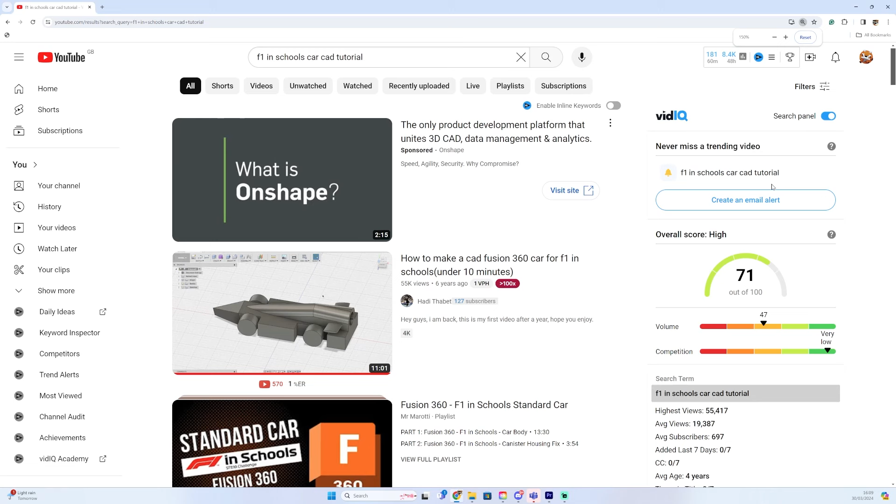So it seems to be that F1 in Schools car tutorials are now either severely out of date, or the ones that aren't out of date have questionable designs. So I'm going to be going through with you today on how to make a good F1 in Schools car.

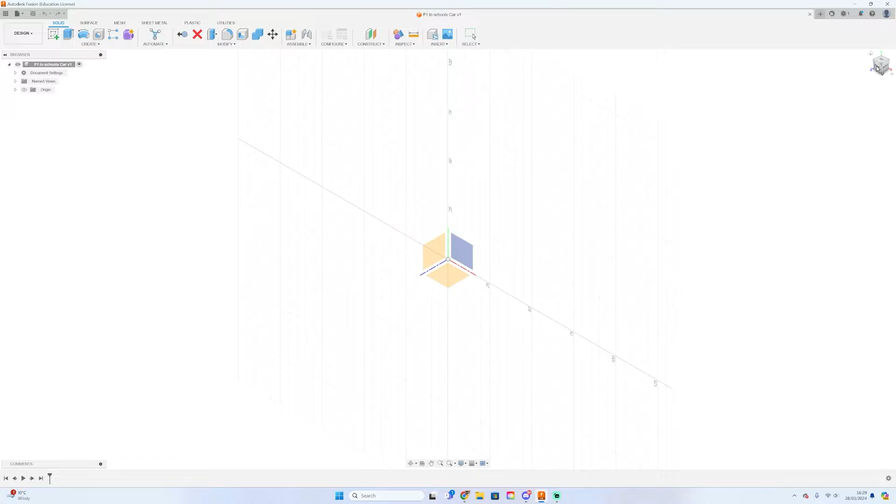So this is going to be a relatively advanced tutorial, as we are going to start looking towards what makes a good professional class F1 in Schools car. So I'm going to be expecting that you, the viewer, already know a bit about CAD and the basic Fusion tools such as Sketch, Extrude, and the Construct tool. And so I'll be skipping over the majority of that and highlighting the key areas of what makes a good F1 in Schools professional class car.

So to start off, we can get the halo. It's a downloadable component from the F1 in Schools HQ website. I'll put the link below.

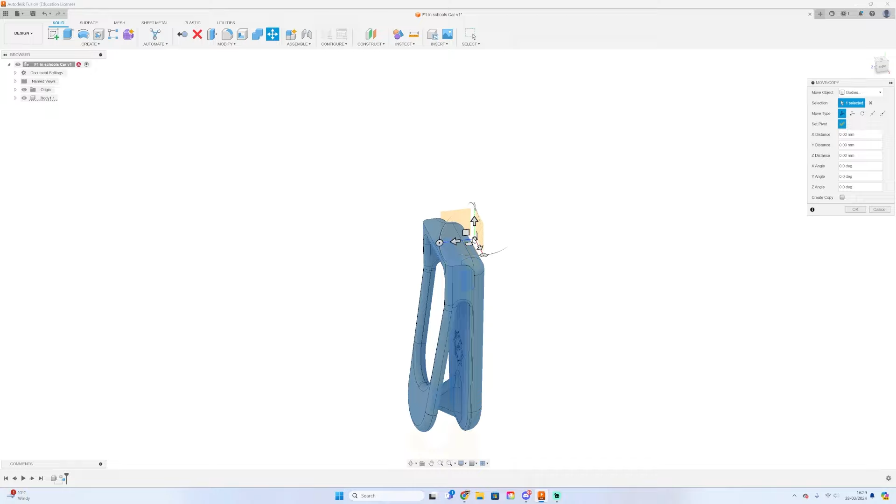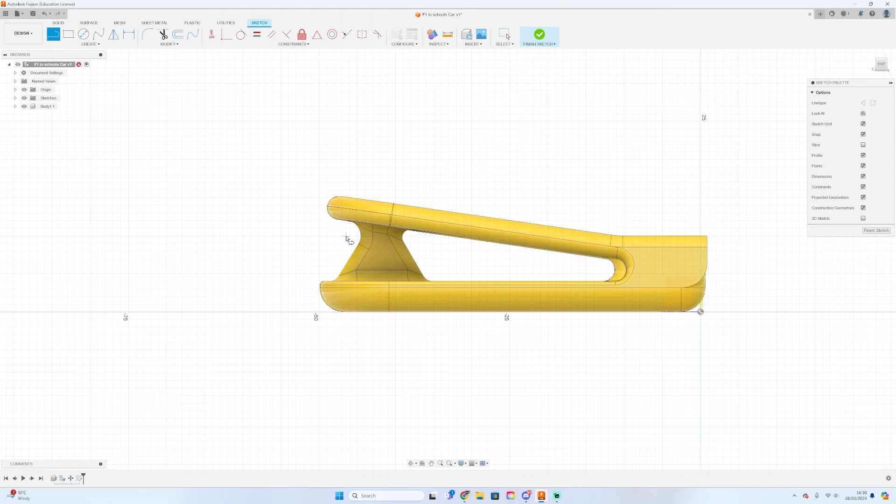And what you can do, you can move it around, and you have to make sure that the circular notch is 34 millimeters off the ground, with a plus or minus 1 millimeter for tolerance. This is just to ensure that it can be caught by the rope at the end of the track. You can move the halo around with the circular notch as the anchor point by clicking the move tool and then hovering over the face that's in the center section of the halo.

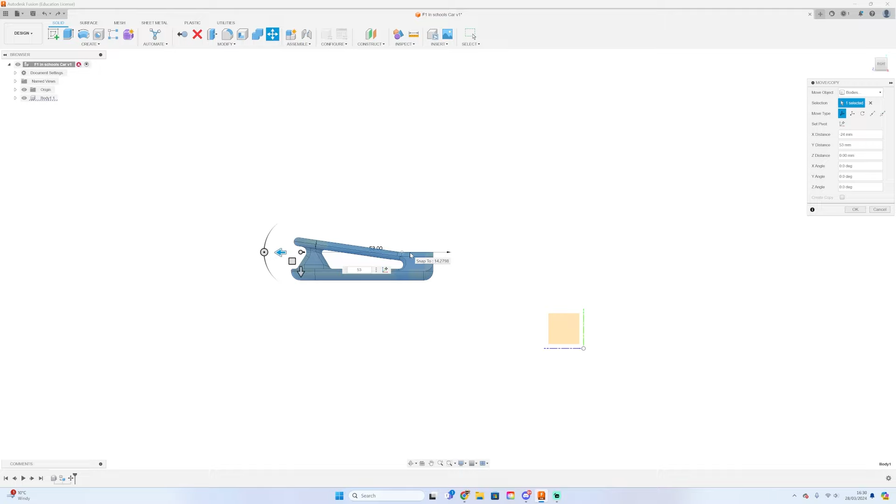Just look on the screen, and if you see the dot being roughly around the midpoint of the circle, you can just click it and start moving around. And then if you start tilting and angling the halo, that should be the anchor point at which it turns. So from there you can now see that the halo circular notch is 34 millimeters off the ground. So now that we've done that, we can start to build around the gas canister.

And so to do this, we know that the minimum height of a gas canister is going to be 24 mil. So instead, we're going to be doing 24.1 millimeters for tolerance. And that right there was my first mistake. You see, when I end up creating the CO2 chamber later on in the tutorial, I realized that the minimum thickness is actually 2.95, which is illegal. So to change this, make sure that instead of using 24 millimeters, use 25 millimeters.

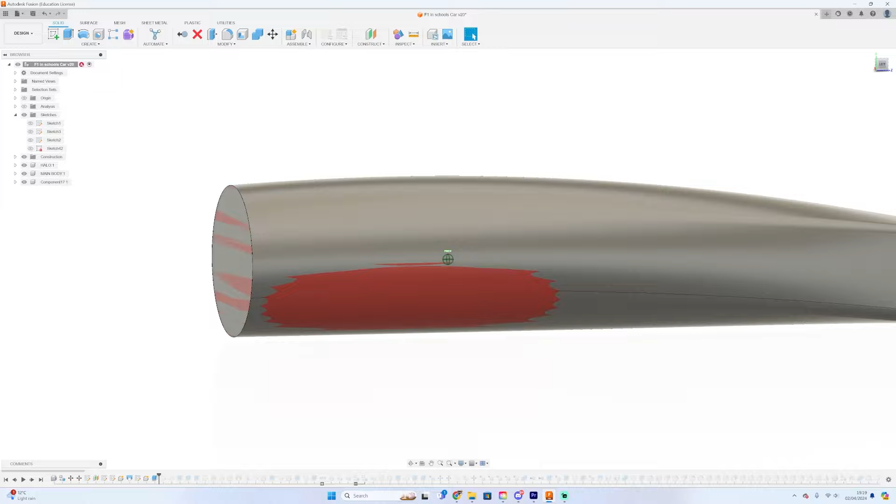And the reason why you're not going to do 24.1 is because between the first two sketches you do, the loft will actually concave inside of itself, which isn't great, and that will intersect with the CO2 chamber. After the first circle, you then sketch the second circle, that is 53 millimeters away from the first circle, your normal bread and butter stuff. But what's after this is then joining the halo.

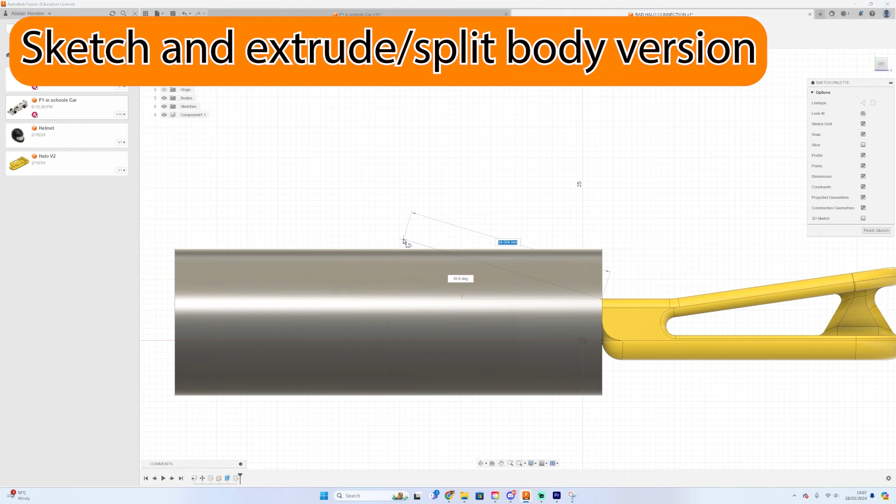So there are many ways you can blend the halo to the back of a car, and one of those is the sketch and extrude. However, it's not a great way to do it, because the sharp edges after the sketch could then disrupt the boundary layer, and it creates all sorts of aerodynamic hazards. So what we're looking for is a nice smooth connection from the back of the halo to the CO2 gas canister, and one of the tools that does this is the loft tool, which we'll look at right now.

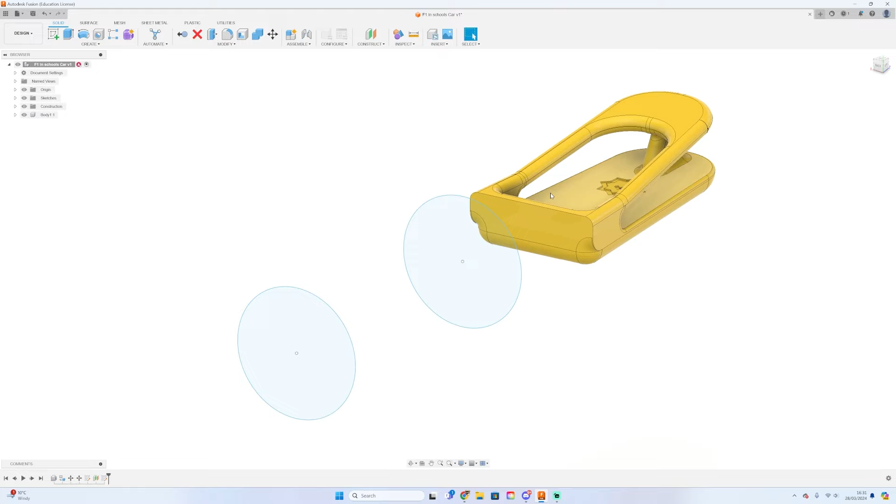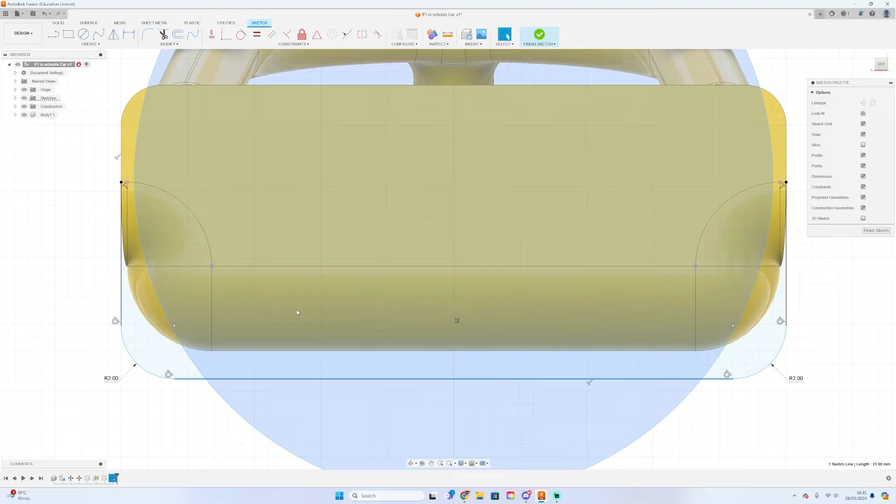But before we can actually do the loft, we need to first set up the back of the halo with a nice sketch, because at the moment the back of the halo has a flat edge that isn't very nice to loft to. So to do this, we're just going to create a nice box around the halo, then fillet off the bottom two edges. After you've filleted off the bottom two edges, you can then drag down the line to increase the area of the shape, and you want this to be roughly tangent to the bottom section of the CO2 gas canister circle, and this is going to be the very bottom of our car.

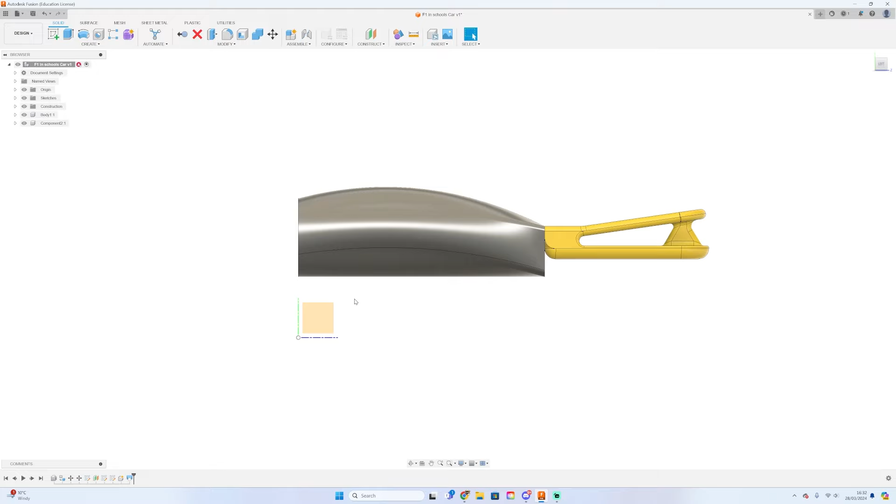So now that we've done that, we can go ahead and click loft and select those three different shapes. Now this is a successful loft, however with the halo being so far back, the loft is struggling to get to the back of the car without creating this really big curve, and this really big curve is creating a lot of frontal surface area, which we don't want.

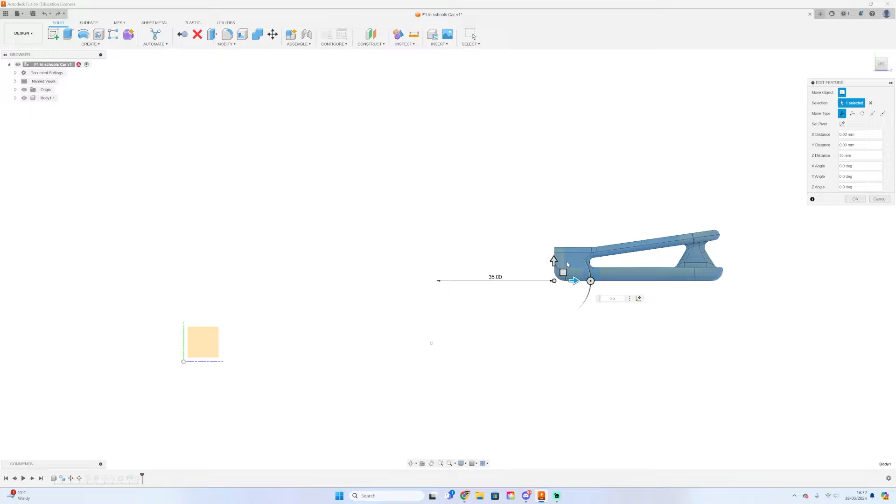So to fix this, we're going to move the halo forward a couple more millimeters, and this should decrease the frontal surface area of the car when we do the loft. And just like that, we have a much nicer connection from the back of the halo to the back of the car with a very low frontal surface area thanks to the loft.

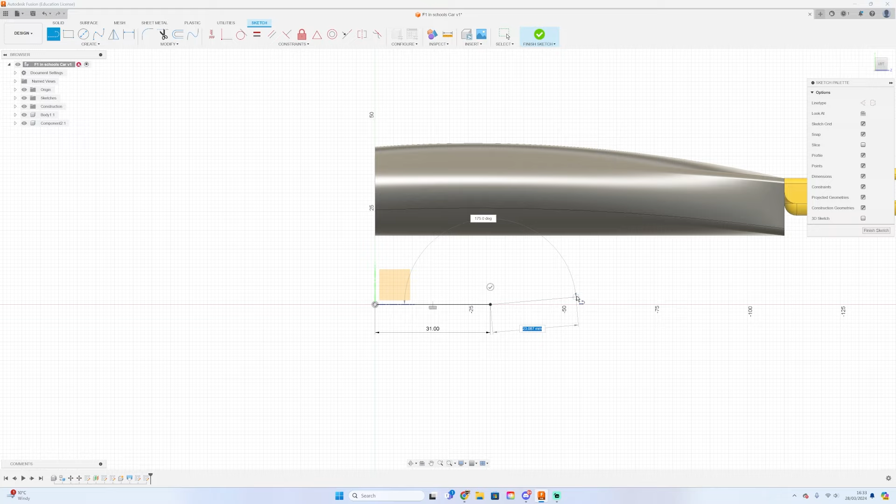So now that we've done that, we can start to look into the side profile of the car. We can start to sketch out where the wheels are going to go, reference plane B, reference plane A, and see what the wheelbase is going to be like. At the moment, I'm just going to be using 31 millimeters from the front and the back for reference plane A and reference plane B, and for the wheelbase, I'll be doing 130, as that's somewhere around the middle. Through your testing, you'll be able to work out what the best wheelbase is, but just for this car, I'll be using a wheelbase of 130.

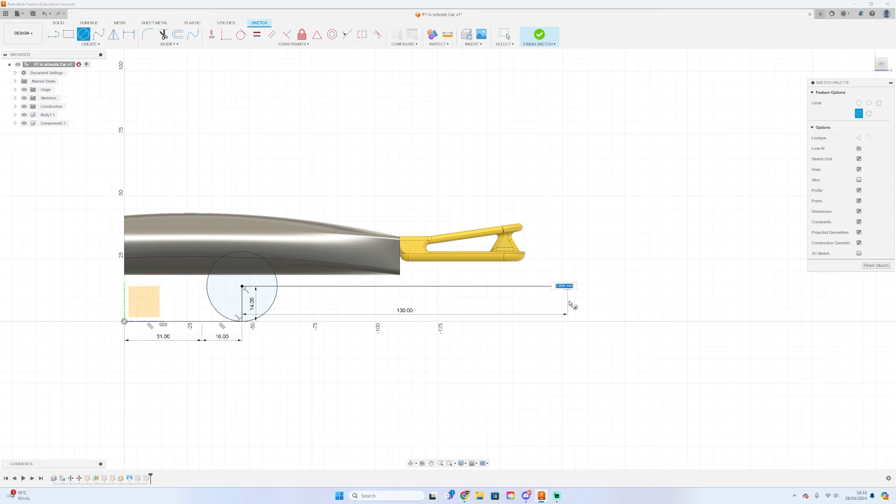Another good thing to mention is that the minimum wheel diameter is 28mm. However, for an additional tolerance, you want to put 28.1 to allow for additive inconsistencies. So that just leaves a bit of extra room to make sure that you get full marks on your scrutineering. Then after doing this, you can extrude them out from the center. You can use the extrusion tool, the normal bread and butter stuff, and you can extrude by two sides.

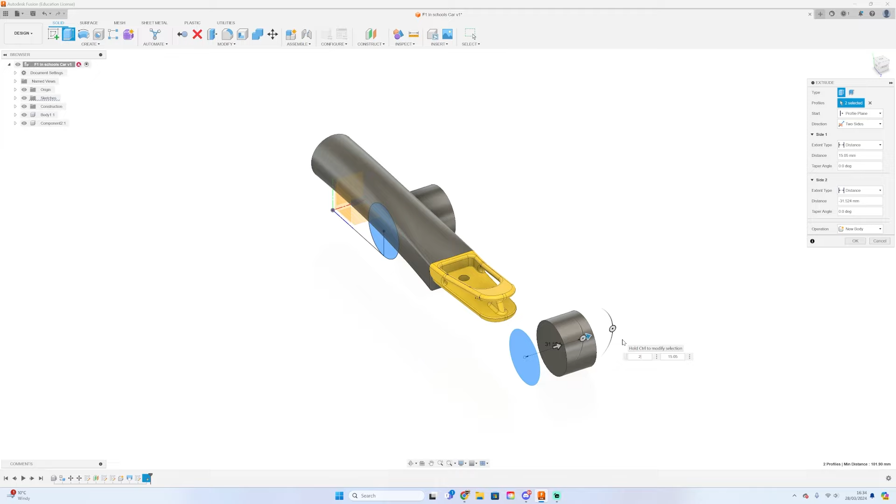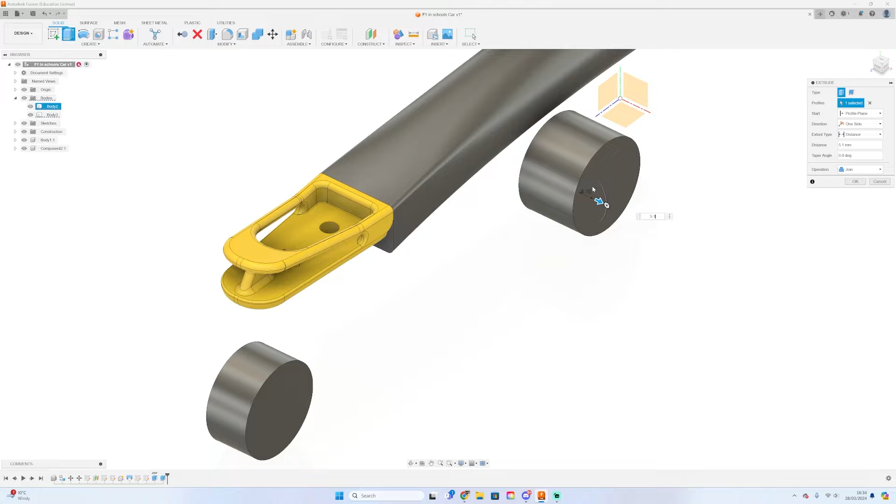The minimum gap for the rear wheels is 30mm, so you have to make sure that you extrude it by a minimum of 15, and then extrude it once again on the other side to ensure that there's a minimum gap being left. The regulations state that the front wheel has to be 13mm, so again adding tolerance 13.1, and the rear wheel needs to be 18mm, once again for additional tolerance 18.1mm.

And just like that, you have finished the first part of the CAD tutorial. You should have something that looks a bit like what I'm showing you on my screen right now.